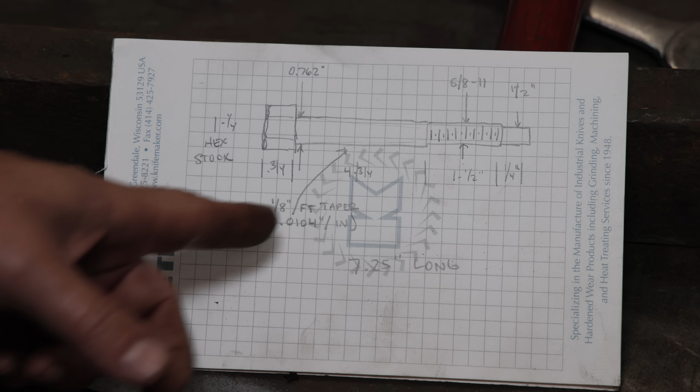I know the large diameter needs to be about 0.762 inches in diameter. So probably what we'll do is turn these out square to that large diameter, and then come back and cut the taper after we've cut everything else.

This is going to be 5/8 inch 11 threaded down here, about 1.5 inches long. And then there's just about 1/4 of an inch that sticks out the end. That's way bigger drawn than what it is, but I know the measurements to work with. So I've got all my measurements that I need. We're going to get over here and start turning some of these things out on the lathe.

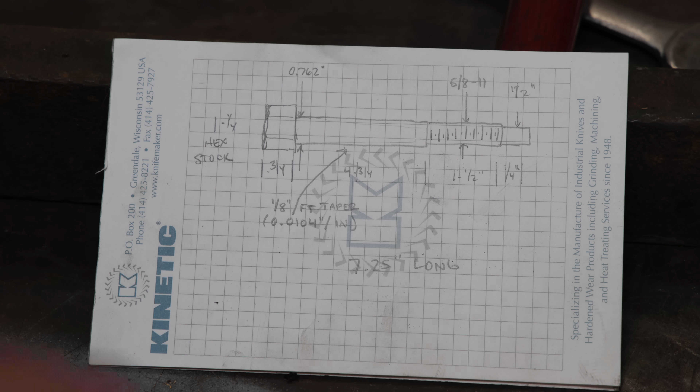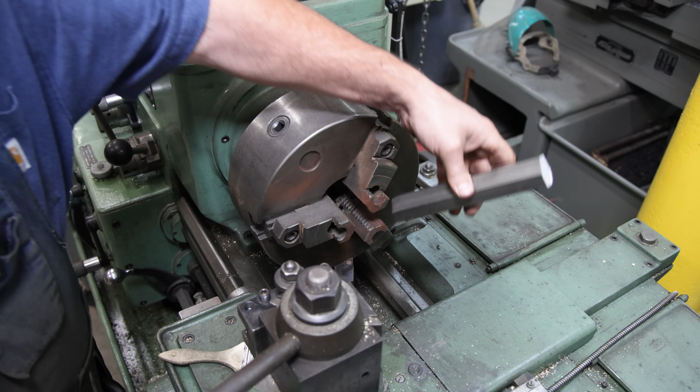I'm over at my Monarch 16-inch lathe, and we're going to be doing most of our work over here on this. I've got a couple of blanks cut out, this is 1.25 inch stock, 7.25 inches long. We're going to start on the head end, and I'm going to go ahead and get the top just faced off and get a little profile put around the outside of that to make it a little bit nicer to handle. So let's fire the lathe up.

So we'll just come in here again, and we're going to face this off.

Get a nice machine surface on there. I'm then going to change cutters.

I'm just putting a threading cutter on here because I want that angle, that 60-degree angle. I'm just going to feed in, and I just want to relieve a little bit around that outside edge of that until I kind of knock all the corners down to where you just kind of got a circle all the way around. Need to go in just a tad bit more. That ought to do it right there.

And that gives me a nice finish on the top of the head of that bolt. I'm going to go ahead and do the other one while I got it set up to do this, and then we'll flip it around and start working on the other end.

So now we're going to flip it around to the other end. I'm going to go ahead and put this end in. We're going to face it, and this end needs a center hole in it.

All right, we got our facing done. And we'll bring our tailstock in here with a center drill set up, and we'll just go ahead and put a center in there. That's going to give us some support for when we're turning the bolt into this.

Now we're going to bring our part out. I'm just going to grip it on the end where the head will be. I want to grip that with as much as I can grip it. That head's going to stick out about 3/4 of an inch, so that gives me a little bit of clearance room there.

We'll go ahead and put a center in here to get it lined up nice and straight, and then we'll tighten this down real good. And go ahead and get that center in there tight and lock it in place.

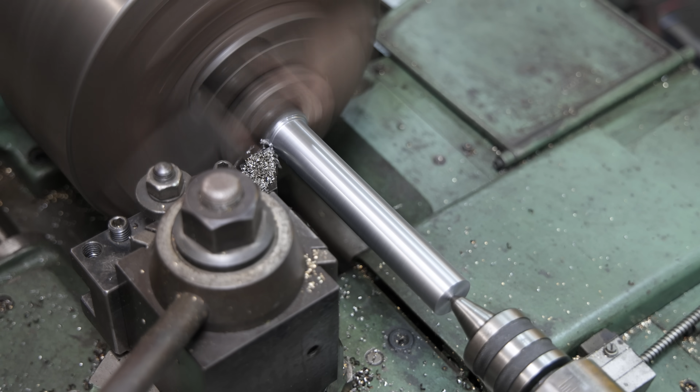Just want to get a diameter on this, see where we're at. It's about 172. Got the same there. Put that in my digital readout point. 1.072.

Just kind of help me see where I'm at, make sure I don't go too far. We'll make another 100 thousandths cut down through there. Again, we're going down to 0.762. We should be at about 0.970 right now.

And down here on the bottom of the shoulder of my bolt, I'm going to go into that 6.5 inch measurement. We're going to pull out, make that nice and flat. And then I'm going to actually go in just a little bit more.

I just want to relieve around until I got a circle all the way around right there. That just gets those corners up so that they're not digging in as we go. That should be to size. We're going to come back and cut a taper on that, so even if it is a little bit off, it's not going to matter right now. But yeah, we're actually right on the money.

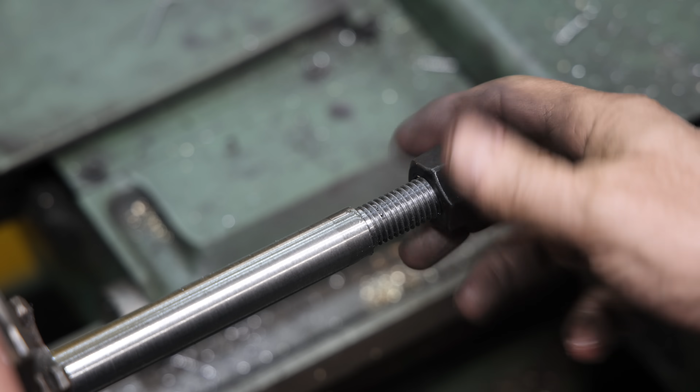And there we go. Nice fit all the way down. Just what we wanted.

So up next, what we need to do is get the taper attachment set up over here on the lathe so that we can cut that taper for this pin. And that taper, again, is 1/8 inch per foot. I'm going to show you how I'm going to set this up using the digital readout and the taper attachment to get it set.

And then we'll come in here and make a couple of light passes before we get to the final measurement and actually use a taper micrometer to double check and make sure we are exactly where we need to be. Let's get in here and put this lathe in taper mode and start getting it set up.

So to cut tapers on a lathe, at least the way I'm going to do it here, I'm going to be using the taper attachment. Now the taper attachment is not an option that's on every lathe, but if you've got one, this is exactly what it's designed to be used for, cutting tapers like we're going to be doing right here.

Normally on a lathe, when it's set up, when your carriage moves back and forth, the cutter moves parallel to the ways in the bed. When we are cutting a taper, we've got this bar back here that can be tilted to whatever angle you want, within the range it can cut, either positive or negative. And instead of following the ways, the cutter is going to follow the direction of this taper.

The way you do that is I'm going to tighten up this bolt right here. When I do, I can no longer move the cross slide in and out using the handle. It's going to be firmly attached and connected back here, so that whenever we're moving, this bar stays stationary. I'm going to clamp it down as well, and it's going to just follow it right along. Let me go ahead and get it clamped down.

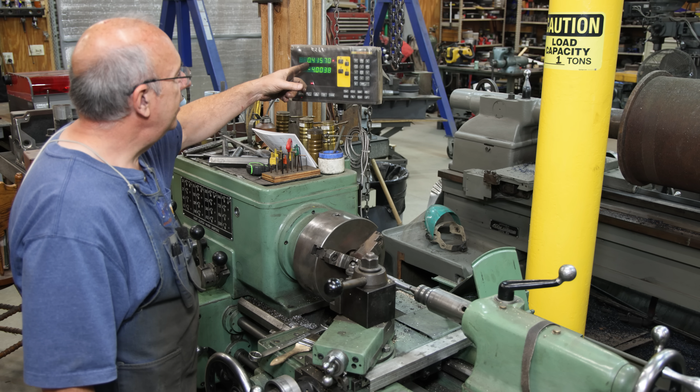So let's go ahead and dial that in. Let's do 4 inches — I don't think I've got room for 6. So a little over 4 inches, but we moved 415 thousandths, how much the cutter moved away from me. Actually it's going to be half of that because I've got it set up on diameter mode — on a lathe you're cutting on one side but your work is turning, so it's also turning on the other side. So the actual amount it moved would be half of that, but since we're doing a compound taper, it's going to be 415 thousandths. So we moved 415 thousandths over 4 inches. Let's calculate and see what that is.

0.415 over 4 inches. 4 inches is 1/3 of a foot, so we'll multiply that times 3. That's 1.25 inches per foot, which is what we had it set up on previously. So previously this was on a 1.25 inches per foot taper. We want to be on a 1/8 inch per foot taper, so much less than that.

I got it over there. I think it's going to be 10 thousandths per inch, so over 4 inches it'd be 40 thousandths. What was it? 10 4/10. We'll do the math, we'll figure it out exactly, and we'll come over here and start making adjustments to our taper bar until we get it just right.

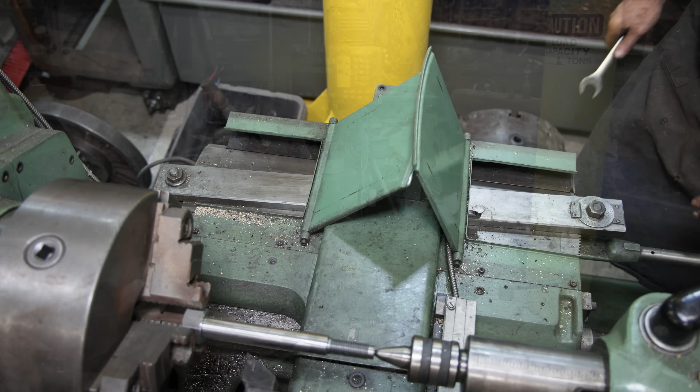All right, so we need to adjust this bar in the back until we get it set where it needs to be. It needs to be almost flat compared to what it is now. There are 2 little nuts that tighten this up, one there and one up on the front, and then this nut on the top allows us to rotate this around. I'm just going to pick a place, and we're going to tighten it back down, and we'll go back around to the front and check it out.

There is a scale on here, but this scale is not very accurate. I've just basically resorted to trial and error to get this thing set up. It's about the best way I know to do it. Let's see where our measurements are, and we'll just keep adjusting until we get it where it needs to be.

So we'll come back over here and do this test again. I'll come out all the way to the end, take the backlash out of it. I'm going to zero both my axes on the digital readout. We're going to move 4 inches again. 2, 3. Go slow on that last one so I don't go past it. Right there.

Okay, 4 inches, and we moved 0.166 inches is how far we moved it. Now for that 1/8 inch per foot taper, I need to be at 0.0416, so 41.6 thousandths. We're still quite a bit too far out, so I need to go make another adjustment. Again, this is just trial and error until we get it where it needs to be.

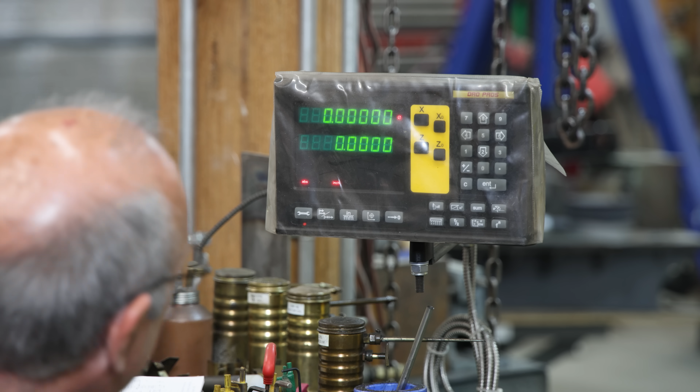All right, I'm gonna zero this out. I've done this a bunch of times and we're so close, I don't think it's gonna matter. So let's go 4 inches, 2, 3. 0.0409, and I'm shooting for 0.0416. I'm within 1 thousandth right now of where I need to be.

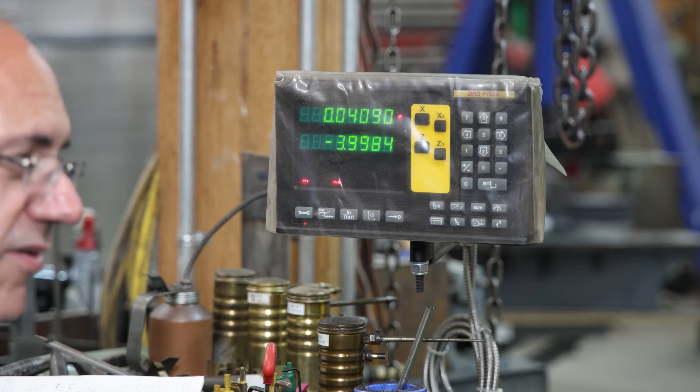Honestly, guys, I've done this about 10 times, and every time the number's a little bit off. You can't get it within 1 thousandth anyway, so some of them are actually better than this. That's about as bad as I'm getting, so it's good enough. It's close enough. 1 thousandth over 4 inches, I can deal with that all day long, every day.

So I think we're just gonna go ahead and start turning this out. What I'm gonna do now is turn it a couple of passes until I get a little bit of meat coming off of this, and then I'm gonna get my taper micrometer, and we're gonna verify and see exactly where it's actually cutting. That's gonna be the real ultimate test, how it's actually cutting more so than how it's measuring on the digital readout. The DRO will get us close, and usually close enough, but I like to verify.

All right, let's fire up the lathe and get to cutting. So I need to come in here and kind of touch off. We're just going to take a light pass here to start with. It's going to start cutting, but as it moves out, you'll see it start feeding out, feathering out, until it quits cutting altogether. An 1/8 inch per foot is not much of a taper, so it'll take a little while for it to come on out.

I believe we're completely out now, so we're going to stop. What I like to do is read off my dial where I finished at, back off, come out, come back in, and then take my dial back to where I was at. But before I do, I'm going to get that taper micrometer, and we're going to measure that taper and see where we're at.

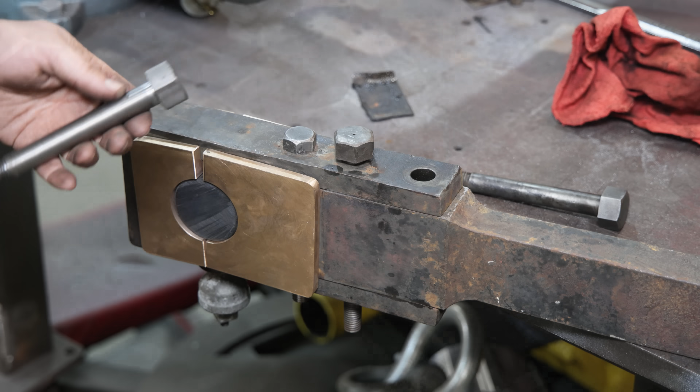All right, we're on 72. But I think what I'm going to do now is I'm going to actually take this out over to the part and fit it in there. I think we're going to be pretty darn close right here. I had to take it back and take off just a little bit more, but I think we've got a good fit now. So it goes in, it drops in that far by itself.

But remember, this is a tapered pin, and we want to drive it in and tighten it up and get it as tight as we can. So I'm just going to take a lead hammer here and just tap it in place. And notice it just sets right in place. That's exactly what we want, a nice tight pin in there that's going to key everything together.

So that one is done. Now we need to knock this one out, ream it, and do the same process, make a nut. And these are all going to be custom fit. I'm going to end up numbering these bolts so that they go back into the same place next time we take this thing apart. We'll just number them up on the cap somewhere.

All right, I think we are ready to move on. I'm going to get my reamer back out. We're going to ream this hole out and rinse and repeat. We'll make another bolt.

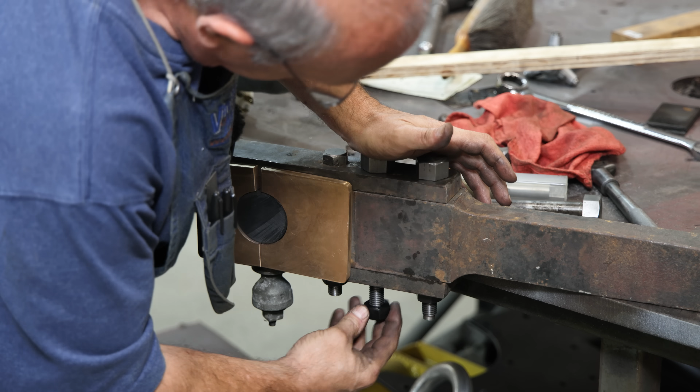And I got my second bolt ready to go in here. We'll drive it home. That is nice and tight. I think we got our pins made.

I am going to stamp these and number them so that we always make sure we go back in the same place. So these will get LF on them for left front, and I think it's going to be number 1, number 2, 3, and 4 in the back. Okay, I think we got this side all built out. Got new bearings, new bolts, new reamed out holes holding them together, new shims.

So this side is ready to go. Still got to do the other side. I'm waiting to get my tapered reamer for it. I may go ahead and rough out the bolts and get them at least to the rough size, so that all we got to do is go in there and finish turning those once we get the taper in.

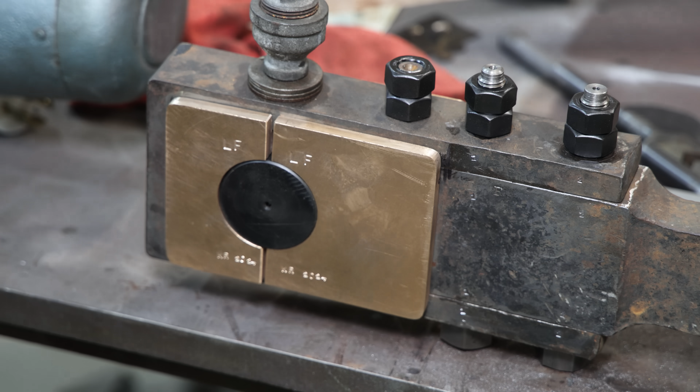But we're making progress. Well, guys, I think this is going to be a good stopping point here for this video. We're going to go ahead and just wrap this one up, and coming up next, we're going to get those tapered bolts made and kind of finish this project out. Hopefully get this one back on the locomotive. We've still got another connecting rod still left to do, so I need to get this thing wrapped up.